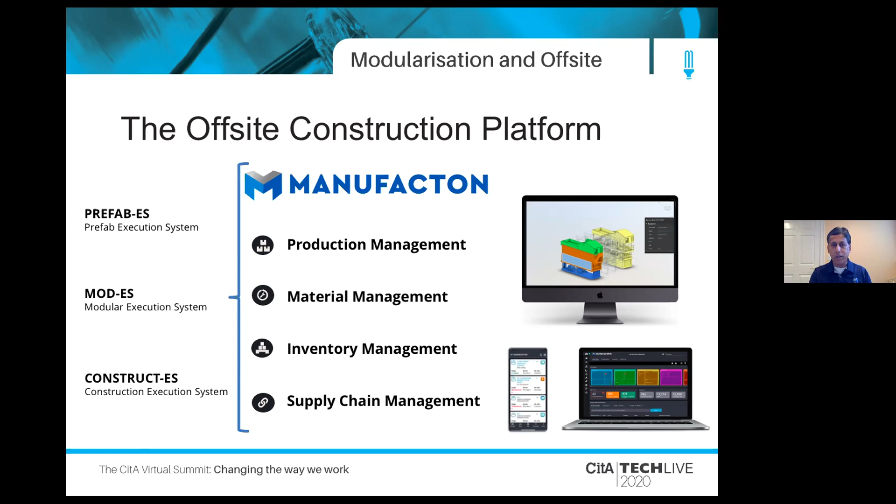So I think the interesting thing now would be to start off by looking at what's happening at the job site itself. All the general contractors are starting to think about, can the job site actually start becoming more like an assembly factory? So instead of bringing raw materials to the job site, can we not bring building components and systems and modules to the site, and the site becomes more like an assembly factory, putting it all together? And so that's the first step towards saying the industrialization of construction is moving construction from the field to the factory.

Alan mentioned CIFE, the Center for Integrated Facility Engineering at Stanford. Paul Teicholz, who started that in 1988, has been my mentor for 30 years. And many years ago, he had said, why are we talking about what we can take offsite in terms of prefab? Instead, should we not ask what we absolutely have to do on site, and start with the default position that everything should be done offsite?

And this was years ago. So it's happy to see now everybody is really talking about why do we need to do anything on site? Instead, do everything offsite, bring it in, and run the site as an efficient assembly factory.

So for example, this is one of our customers, Consigli in Boston, a very innovative general contractor. They had a project in Cambridge, Massachusetts, 50 Rogers, a very tight site, not enough space for even materials to be stored on the site. And what they said was, okay, what can we take offsite? So they coordinated the 3D model. And by the way, we work with Revit, Navisworks, BIM 360, the Forge Viewer, so we have a really good integration with the whole Autodesk platform.

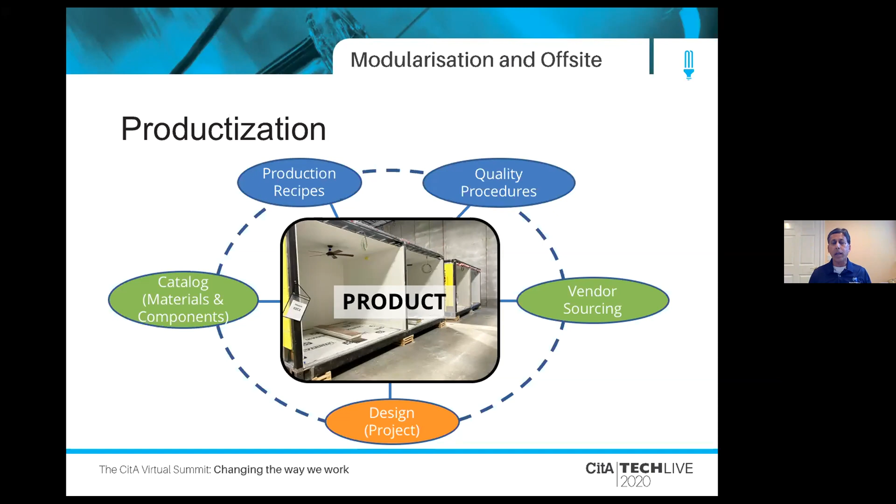So the interesting thing here is, from a general contractor's perspective, what we are starting to see is many of them are either building modular factories or they're buying modular factories. And what they're trying to do is take their self-performed work offsite. So for example, a pretty innovative large general contractor in the US, DPR, they built out a factory in Phoenix to do wall panels called the Digital Building Components. That is their own factory.

And then they purchased SurePods, which is a bathroom modular builder in Florida. And so now they're producing their own bathrooms and their own wall panels and so forth. And at the same time, they're working out their prefab strategy in terms of what they want as far as their productization of other capabilities, where they might work with other modular builders, other panelizers, other trade contractors, in order to try to get everything done offsite before they come to the site. So that's a good example of a blended strategy of working with other companies and building your own factories, or in their case, buying one and building one.

And then you've got a company like Skender in Chicago, which actually verticalized the whole process, where they brought in an architectural firm, and then they said, okay, we're gonna do the design, manufacturing, and construction verticalized for multifamily residential in Chicago. And they were using structural steel for it. And basically what they've ended up doing is driving from their factory to be able to do volumetric apartments that they could then send over to the site for completing the installation.

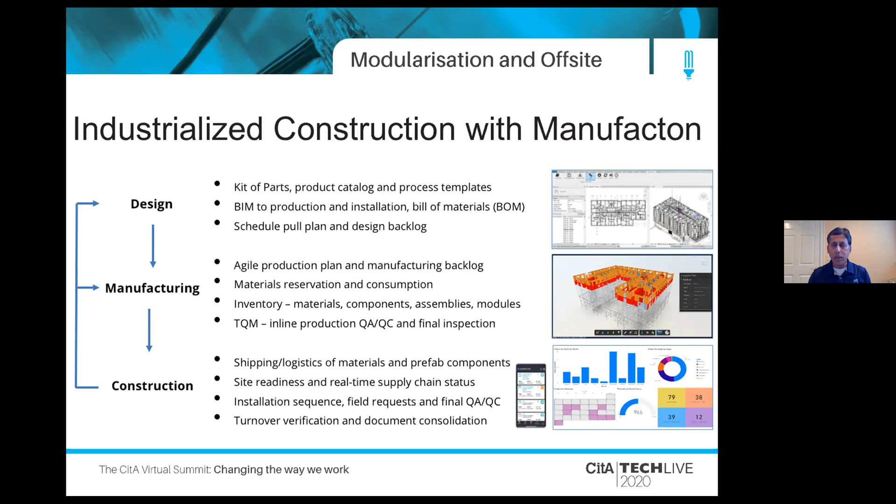And they've all been telling us, at least, that in the new normal coming out of COVID, they all see industrialization of construction is the way to go. And nobody is even now questioning why should we do it, and so forth. They're literally figuring out how best to do it from their vantage points. So I wanted to share what we have been seeing in terms of this acceleration towards modularization and towards offsite. Thank you.

Great overview, and a nice way to end the message that industrialization is the way to go. Thank you, Raghi. That was an excellent presentation. We have a few comments on the chat. I think, Ralph, you might have a question there. I think I prompted a comment by asking how early in the process should we be bringing modularization into the design? I know Ralph might want to elaborate on that.

Yeah, well, it's one of the challenges you see that most projects progress quite far into planning, detailed design, tender, before the decision is considered whether to go modular or offsite. And then often the effort to try and reverse engineer a project into a modular offsite solution is too expensive or too disruptive, and that becomes a stumbling block.

Of course, the procurement route that you choose would be impacted by making early decisions to engage with providers, because I suppose a lot of particularly public clients would feel they still need to go through a traditional tender process under public procurement. So the question really was, how do you integrate the suppliers into the early stage design?

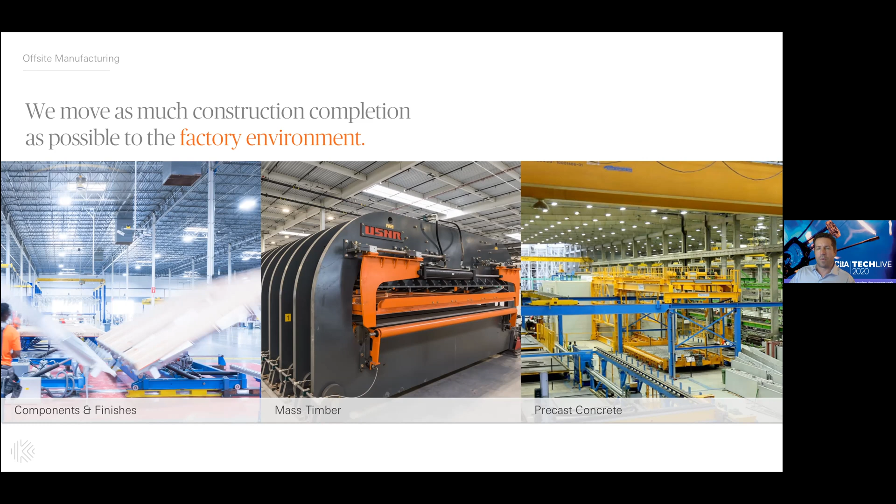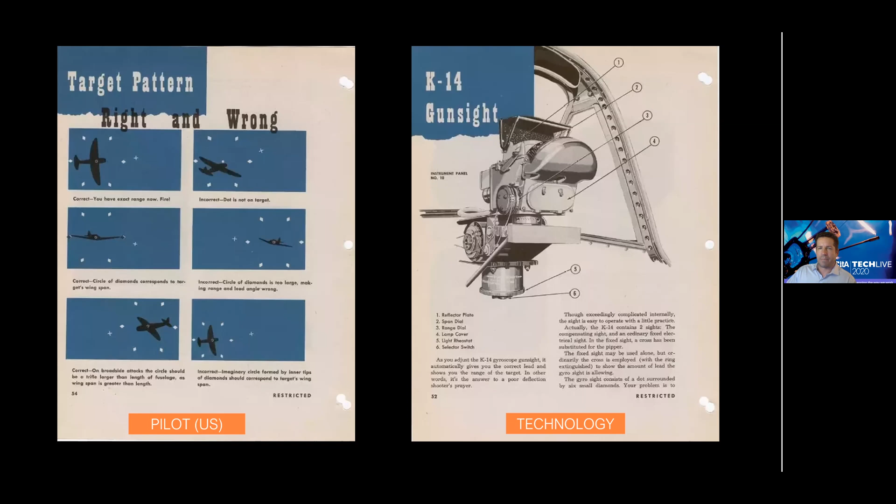And I think this is an analogy on the technology side. I think a lot of technologists approach it technology first, and innovation does come that way. But I think you have to understand where you believe the industry is going, and then technology is really a means to help you achieve those ends. So for the purpose of discussion, I'm going to talk about 3 things that we think are inevitable that will change the industry, and then how the technology we're developing is going to position us to take advantage of those opportunities.

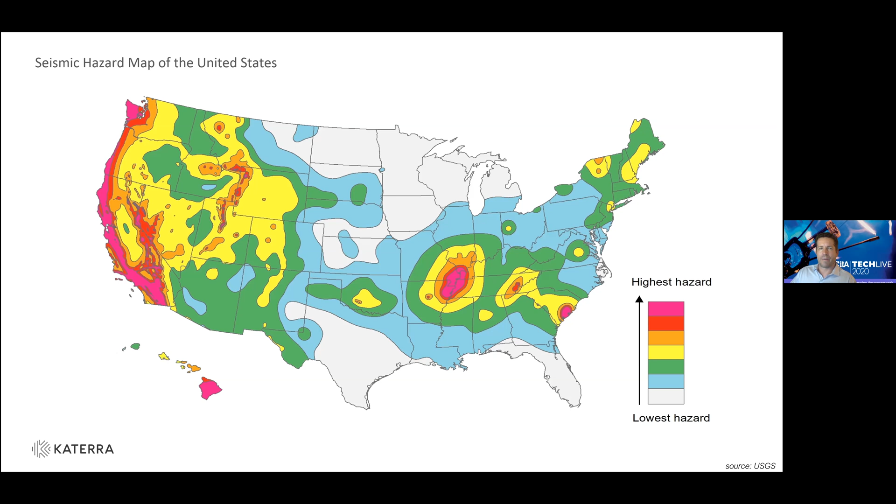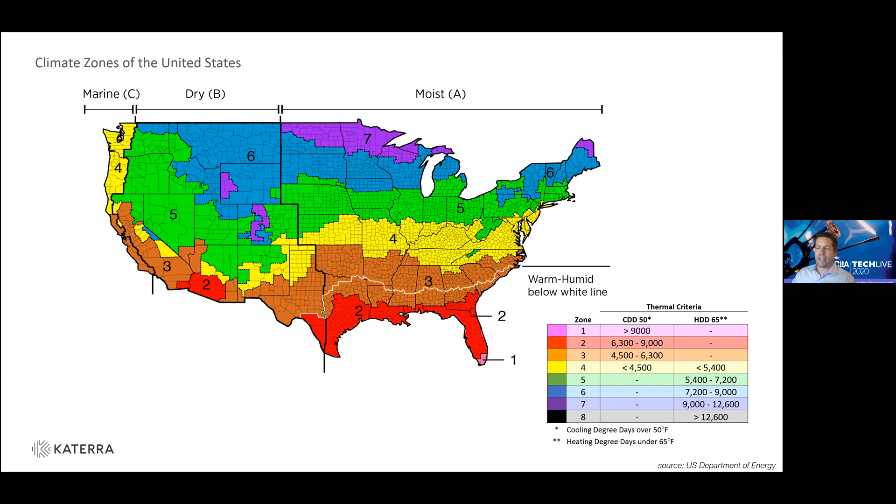The economics of how much work you do in the factory, what we call the level of completion, from a cost perspective, the optimum varies depending on how expensive that work is to do on site. So if you're in the southeastern United States where construction labor is relatively cheap, you might want to do less work in the factory compared to markets like the Bay Area. And how do you design a system that is able to have different levels of completion depending on the market?

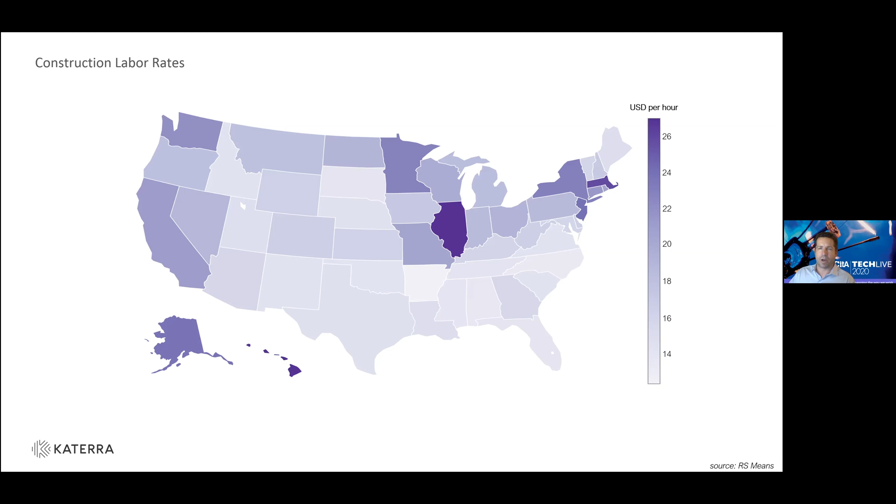So to achieve that, Katerra has approached how we can leverage technology to assist our designers in developing these mass customized solutions. To talk a little bit about that, this is the 24-unit garden apartment project that I mentioned previously. Of course, there's an element of modularity to the design. Katerra approaches it as many multifamily designers do, from the unit first.

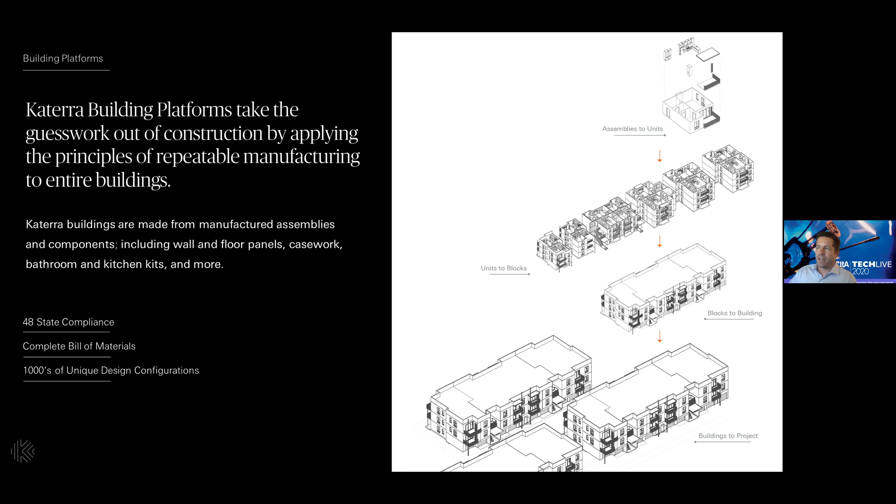So we have several standard units that can be combined in different ways into chassis; there are 3 chassis to each 24-unit apartment building. From that base standard set of 12 or so different units, we can get quite a variety of different building types that all fit into this modular scheme, and that enables us to meet different market performance. So that's one effort of modularization.

One of the main challenges that we faced is developing that fabrication level of detail model and doing that in a cost efficient and timely way. So early on in the business, we would have the architects and engineers designing a permit level drawing.

And model in Revit, but that wasn't really designed with an eye towards fabrication. And so our component design fabrication engineers were rebuilding the model from scratch to create a fabrication model that has every stud and every piece of hardware located. It's taking quite a lot of time and cost.

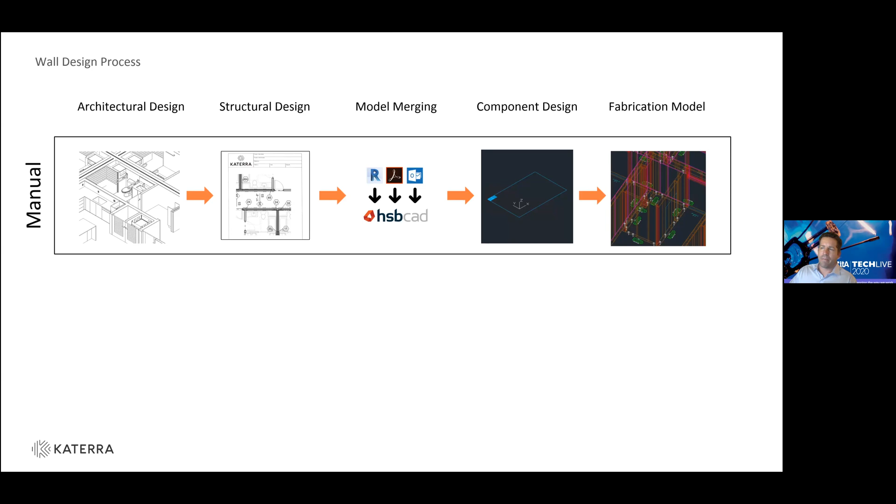So using software, we changed the approach, and we had specific BIM standards in which the architects and engineers had to use a kit of volumetrically accurate components and attach metadata that would specify the framing types. That would also drive the drawing production, but it would also be used by the software to automatically lay out the framing and place hardware, so that wouldn't be a manual step.

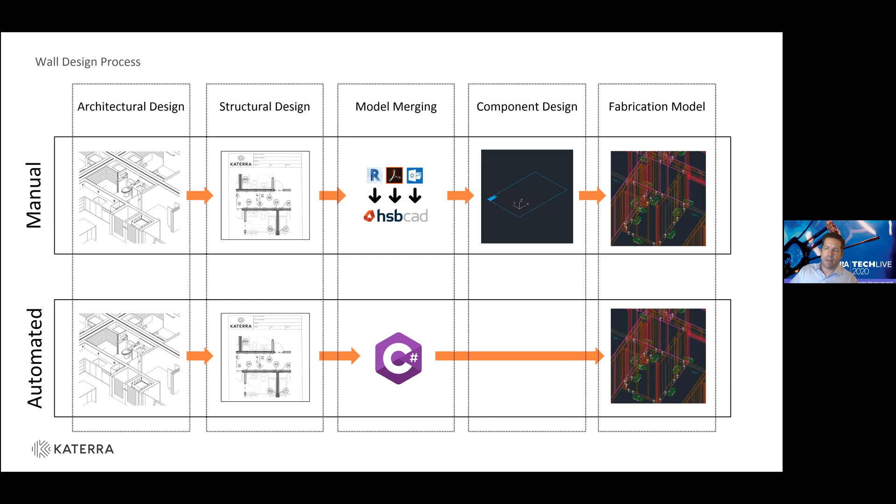So we applied this systematically over time to reduce effort in the component design phase. I won't go into detail of all of the different steps that the designers would do to create a fabrication model, but we looked at which of those steps could be automated. And over time, today we're at roughly 30% of the effort that we were in late 2018.

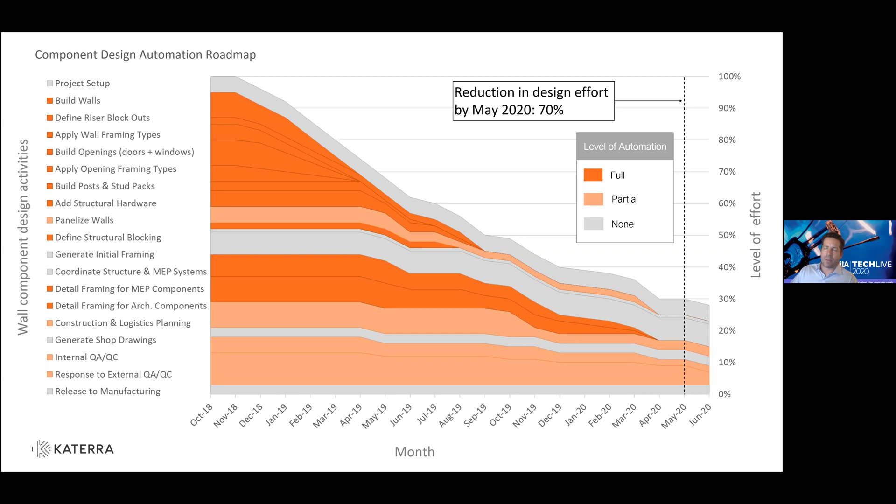And what's interesting about that is it really changes the skill demand of what we need on the design side. Before automation, we had roughly even percentages of novice, being less than 2 years in the trade, journeyman, and then experts, meaning 10 years plus. And what we found after the automation is that we needed less of the entry level folks, as you might imagine, because those tasks were often helped with the software. The size of the pie isn't the same in each case, but there's relatively more demand on experts to really handle the unique cases or quality control the output.

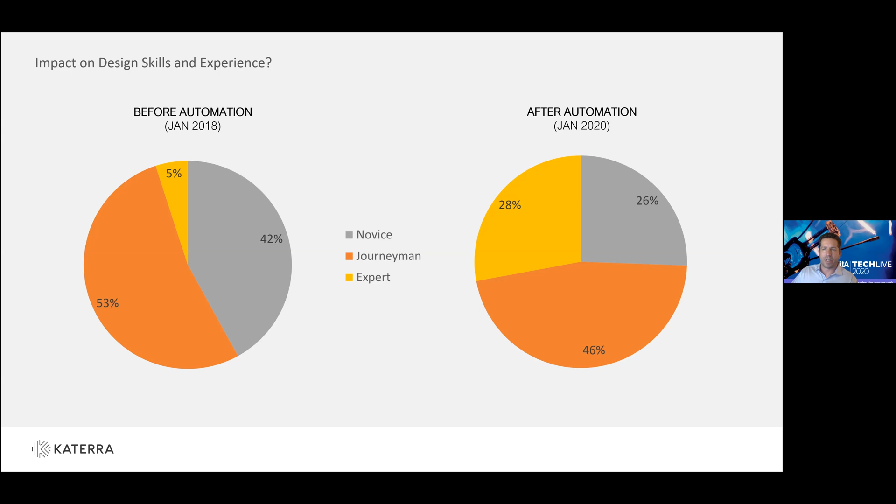And so it's interesting, what does that mean in terms of young designers entering the industry? We're already seeing that a lot of the designers have some background in technology and software development, and so they become tool builders and contribute to the business that way. So we've paired young designers that are able to develop scripts and automation with our more experienced designers, so they're working together to build tools that will enable the business to be more efficient.

The final point that I wanted to make, and I think Raghi touched on this, is this feedback loop of, once we really understand the production system and we have an automated design, we're able to rapidly iterate and do some very interesting things from a product development perspective. And I think that's really exciting for the industry. I'll touch on a couple examples briefly of that.

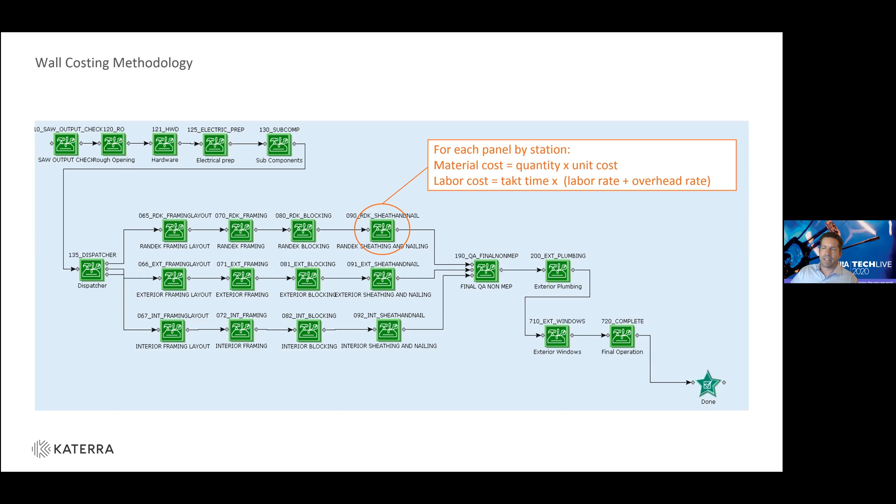And what that enables us to do, and is interesting from a design perspective, is we can surface that information to the designers so that instead of them specifying the construction of the wall, for example, they're defining the design space in terms of what different materials they want to use, what different spacings and sheathing type, and what performance they need out of the assembly.

And then they submit that, and then the system is recommending an ordered list of constructions by cost that best meet that criteria. So the engineer is recommending performance, and the technology is helping them understand cost. And what's important about that is the factory is pretty dynamic. They're constantly changing the layout or the equipment, at least that's the case in my experience. And so this system is constantly learning and updating itself based on what is cheapest for the factory today. And so that enables the designers to have current access to that information.

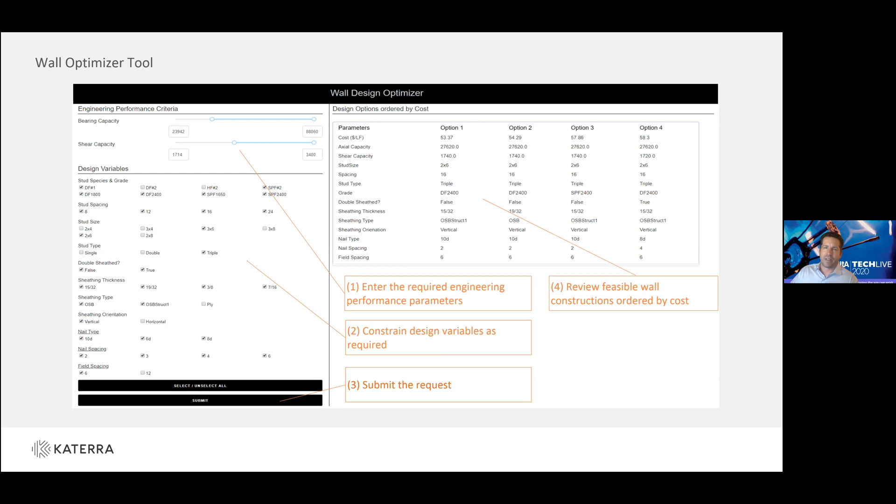We've gone back and sort of retrospectively analyzed past buildings, and that's enabled us to look at millions of options instead of traditionally just a few that would be done manually, and achieve some margin. So we're not talking about huge margins here. I mean, just an extra 10%. But I think many of the building systems can be optimized in this way. And if you're able to do this systematically, you can achieve meaningful differences in cost just by understanding your production system and surfacing that information up to the designer.

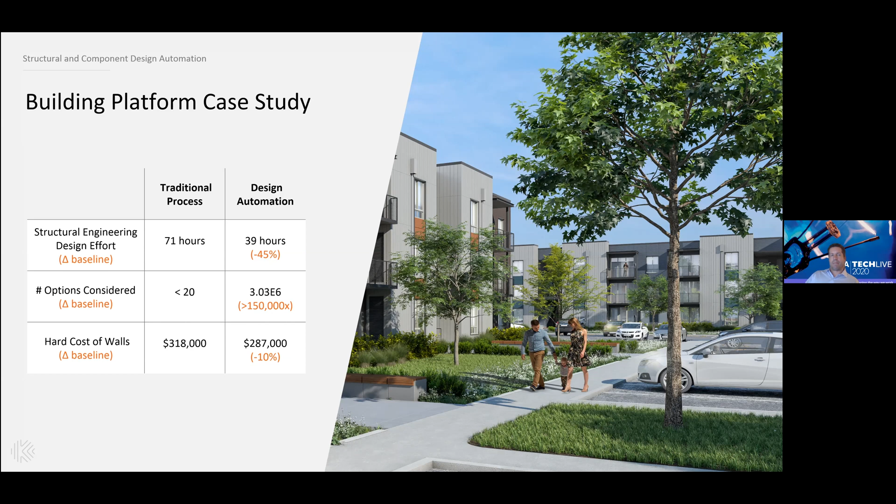And the final piece that I wanted to talk about is really about the bill of materials and developing material forecasting. So one of the challenges that Katerra had was, there's an advantage if you're able to understand your material demands early. You can buy more from primary suppliers at a discount. And we weren't very good at doing that. So we've gotten better over time by applying some technology.

So right now we have all of our Revit models in the cloud. We're able to analyze those at various levels of design and fill in any gaps. So if the structural hasn't been designed yet, we're able to look at historical data to fill in what materials are likely to be demanded, and then surface that at a portfolio level to our materials group so that they have, say, a 12-month forecast of what the material demand will be. And that's enabled them to negotiate better pricing with suppliers, since they don't have to buy their material from distributors or reps on short notice at a markup.

With that, just wanted to touch on a couple of the technologies that we're developing to try to enable that tighter integration between design and production. So I'll turn it over to you, Alan.

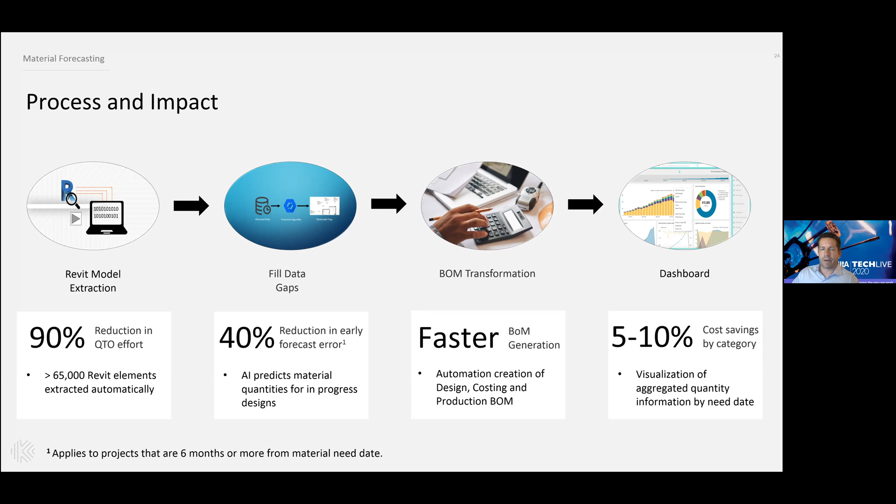Thanks very much, Fraser. That was excellent. So it's obvious then for companies like Katerra that you're constantly making improvements, learning how to remove the rework and to become a leaner manufacturing company, I suppose. So my question is, to what extent do you look at lean construction and the Toyota production principles and all that?

Yeah, I think we do. In the same way, I think one of the learnings has been that needs to extend beyond just the factory, right? To the site as well. You can't just optimize for the productivity of the factory. And one example of that is panel sizes and how panels are routed through the factory. That has to relate to the erection sequence, right? There may be a most efficient way to fabricate those. Of course, they have to be pulled off the truck in a certain order to be set on site.

And so it really needs to be a holistic optimum in which you're considering on-site assembly, logistics, and fabrication. And so from a technology perspective, I think that is something where you have to be able to look at that overall.

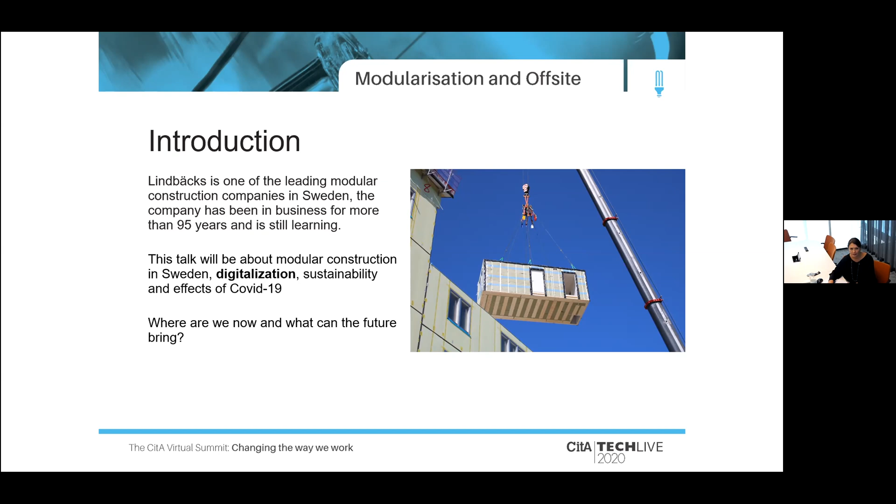So modular construction in Sweden: 45% of all housing construction has some level of offsite construction or panel or modular. So it's quite a big industry in Sweden. We have different types of frames, but mainly high quality timber. We have a lot of wood in Sweden, so it's natural to be using that. Sustainability, time on construction site, and quality, being able to do most of the construction in-house, are driving forces that support modular construction.

There is a range within the companies that are in the modular construction business, from family houses that are delivering products to projects where we are working, from single family to multi-family, hotel, student and retirement homes, and so forth. And how the business is done is different. If it's a one family home, it's more from the catalog, or we have companies that are quite far ahead in the digital part, where they can configure their houses online, mainly more simple houses like garages and so on.

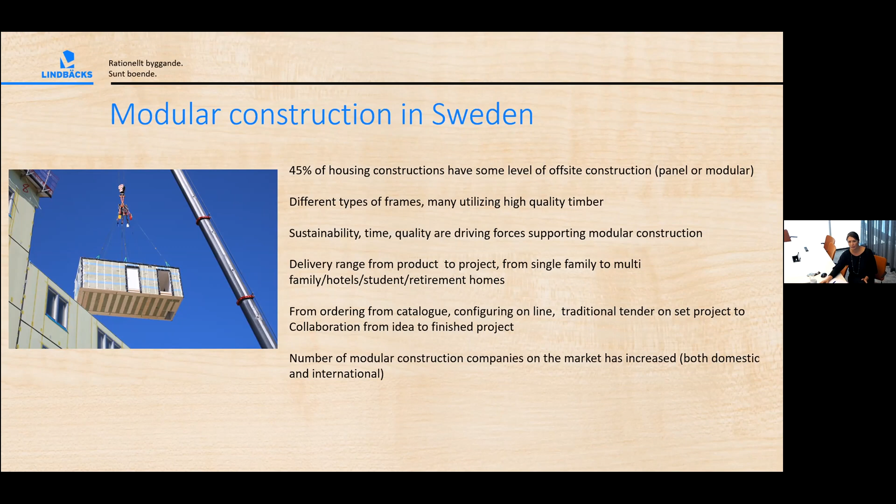Yeah, and traditional tenders are one part that we sometimes get in touch with, but most of the time we try to collaborate from idea to finished product with the owners. We have also seen that the number of modular construction companies in the market has increased in the last 5 years. And we have new players coming in, both domestic and international.

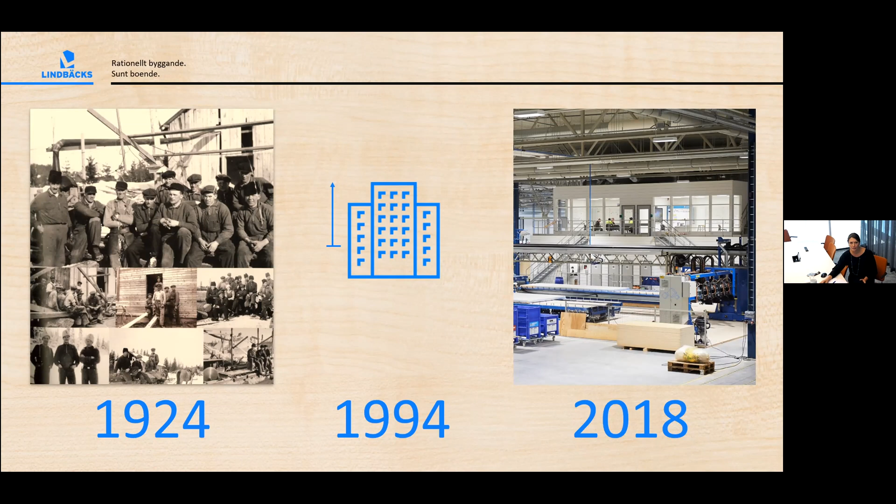If we look a little bit at Lindbäcks, we started in 1924. In 1994, there was a change in regulations in Sweden, so that we were able to build higher houses in wood. So that was when we started going into modular construction. In 2018, we started up a brand new factory that more than doubled our capacity. So that's where we are now. And this is the family that is running the company at the moment, third and fourth generation, you see here.

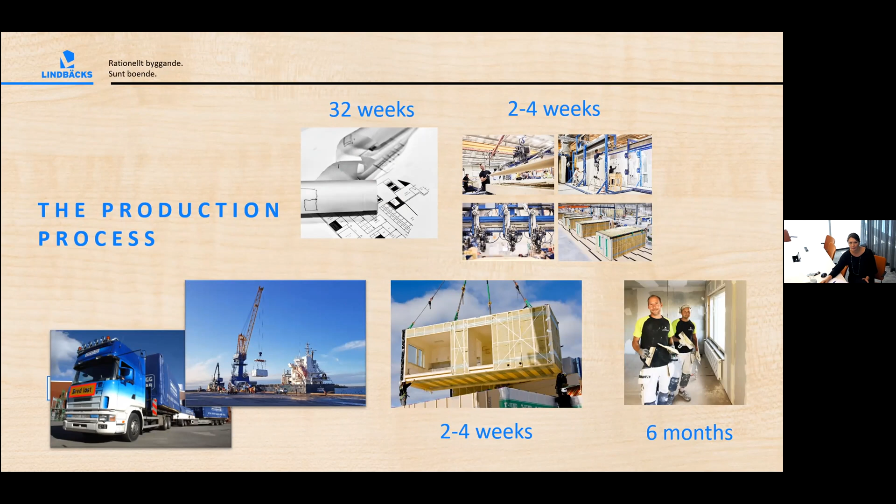What we are building is 2 to 8 story family housing, condominiums, student homes, rental apartments, retirement homes, and some hotels as well. The production process is that 32 weeks before we start in the factory, the engineering starts. And then we are in the factory 2 to 4 weeks, depending on the size of the project. Then we transport the modules either by truck or by boat. And then we assemble 2 to 4 weeks on site, and we have a finalization period of roughly 6 months. And here is a short video that I'm going to play that shows our new factory.

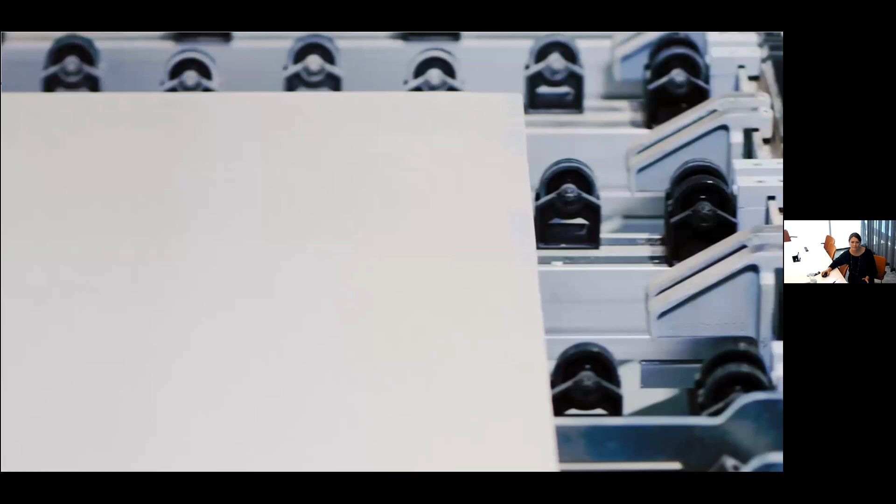Hi, I'm Henrik and this is our factory. We are an industrial building company using wood from the northern forest, creating apartment buildings in Europe's most modern production facility. In a weather-protected environment, the volumes are built, step by step, along our preparation station and our main production line. Our building system can fill many different needs.

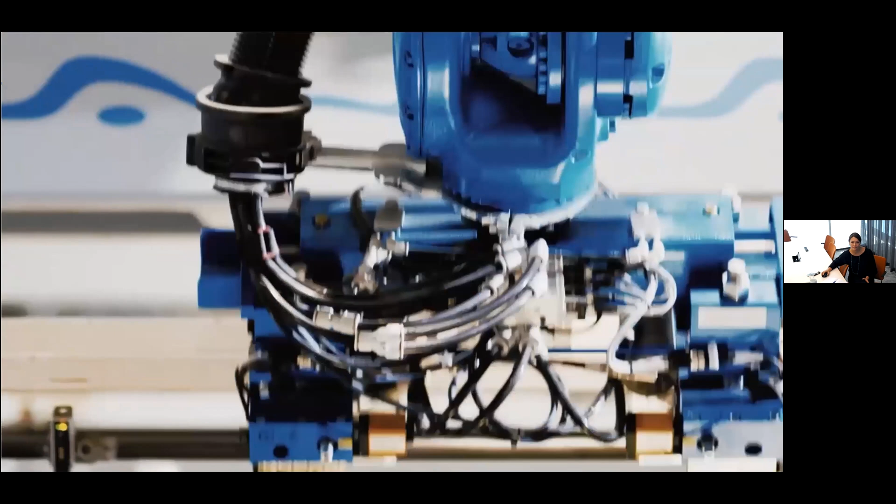We build everything from student housing, rent-controlled apartments, to condominiums and retirement homes. We offer a full-service solution where we take responsibility for the entire process. This means security in terms of price, product and delivery times.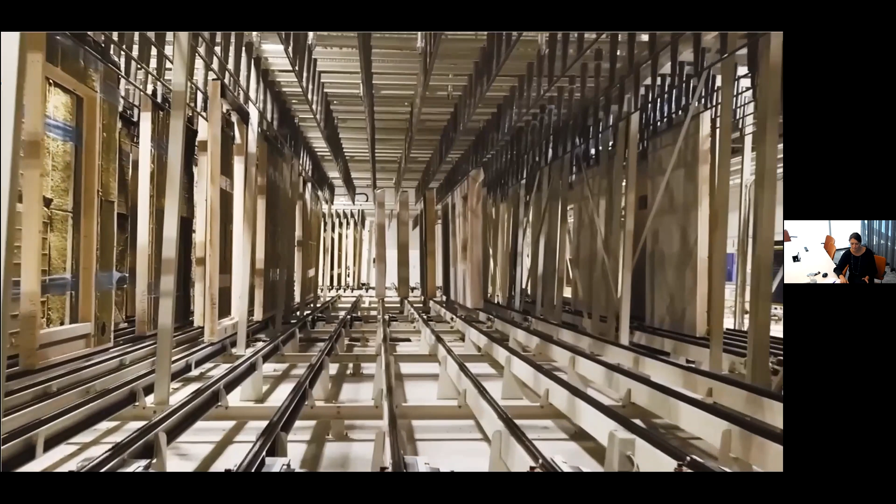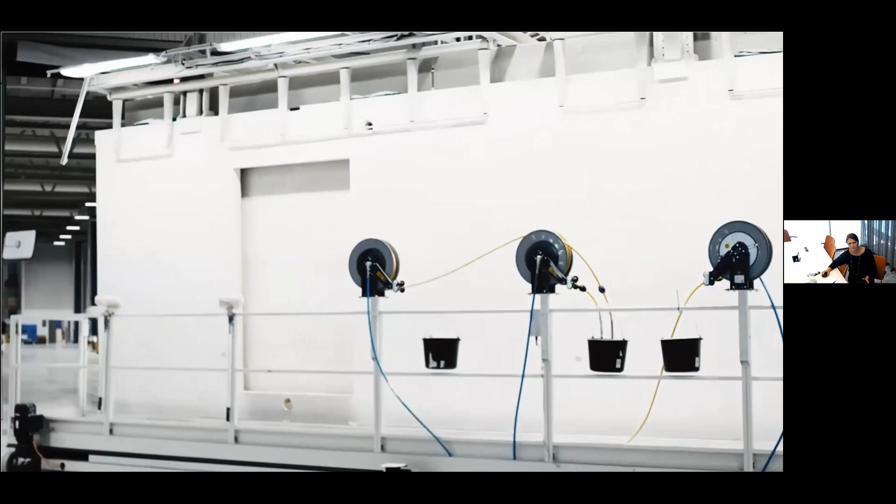Along the wall line, the exterior walls are put together. Here, we assemble windows, bolt, insulate, and paint. When the wall is ready, it proceeds to the main production line for assembling. In parallel, the partitions are built and painted. Just as the exterior walls, they are fully finished when they are assembled.

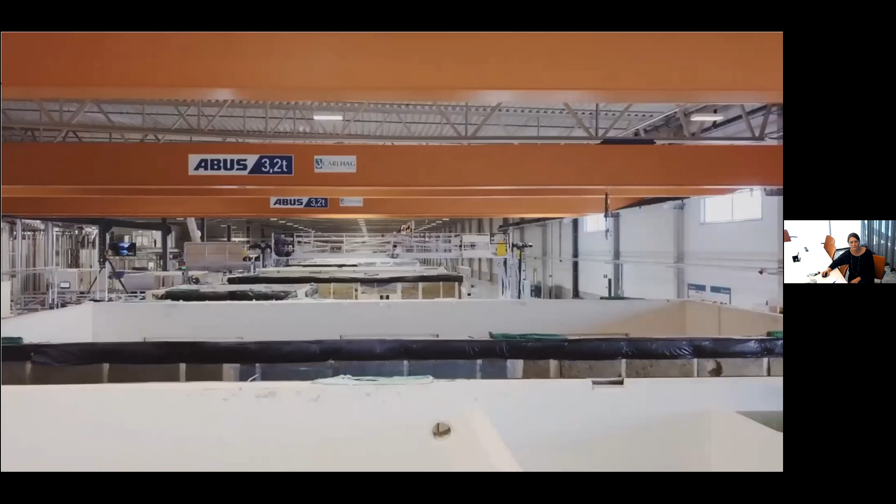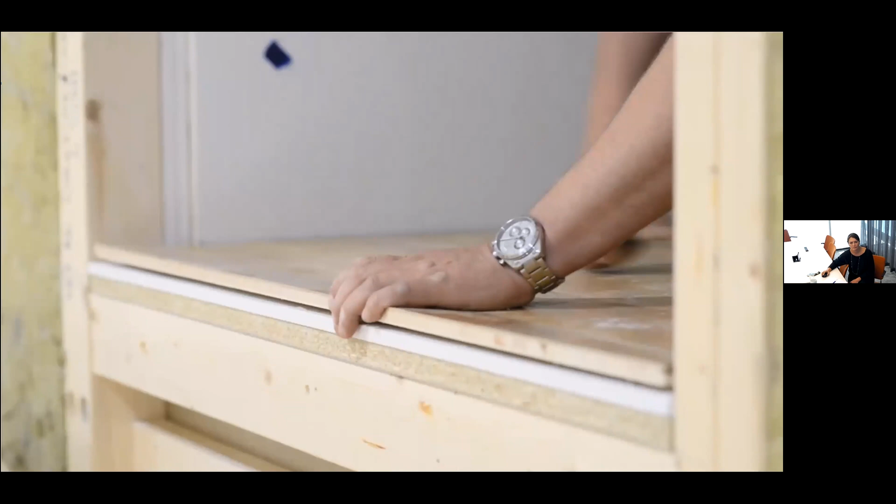The main production flow begins with the construction of our floor structure. Then our composite bathroom is put in place and partitions are applied, as well as exterior walls and ceilings. When all elements are put together, we install the kitchen and apply the floor surface layers and complete with plumbing. After that, we review the volume to ensure quality.

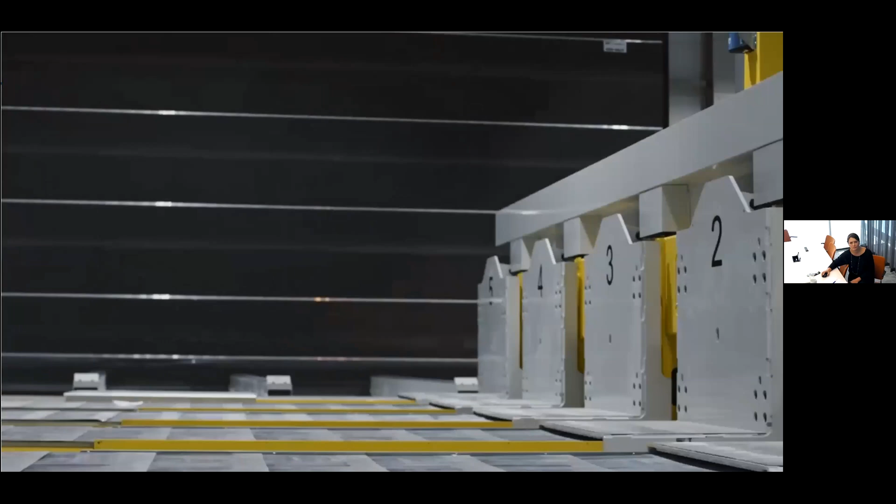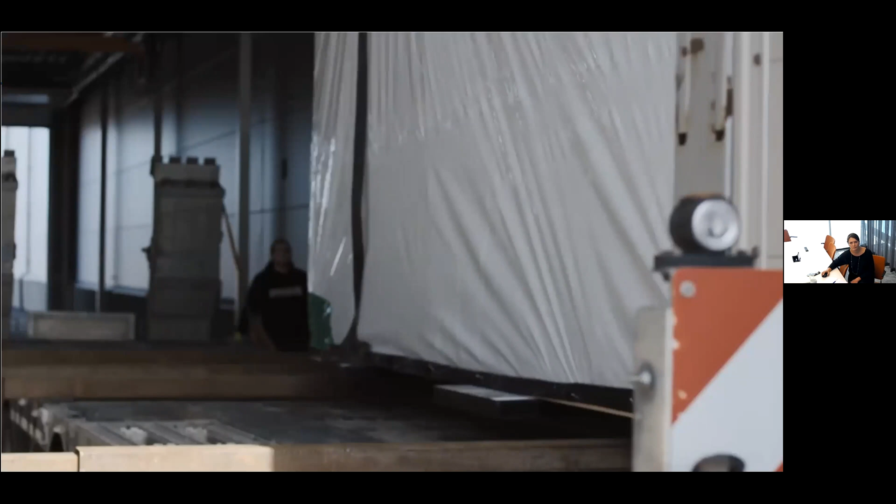In the last step, the module is sent to the automated warehouse. Here it's collected by an autonomous robot that loads it on the trucks. All that's left is delivering to the construction sites. Thanks to our industrial construction, we manage resources efficiently and build climate and cost efficient with high security.

We build industrial because we believe in creating homes for more people. We build industrial because we believe in living for the many.

And these are a few of the projects that we have finished. So this is in our hometown, Piteå, where we built Tallen. This is here in the Stockholm area where I'm also located, where we have built condominiums, 203 apartments.

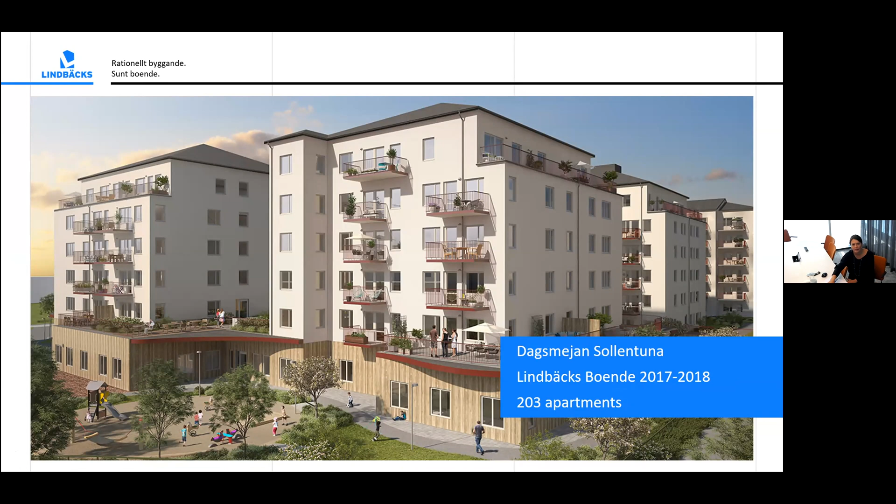And digitalization then, going into that part. Where are we now? We see that in the industry in Sweden, it's starting to mature, it's starting to happen in things. Some have reached further than others, but most are on a journey and we still have a long way to go. But there was a recent poll done by a company, and they were asking people working in the construction industry on site and with engineering and so on.

And it shows that 83% of the workforce believe in digitalization. 97% think that they will use more digital solutions within the coming 3 years. So there is starting to become a kind of a pull effect, that people are asking for digital solutions rather than them being pushed on them.

At Lindbäcks, we have been implementing quite a few digital tools to support our processes over the last years. It has been incremental and continuous improvements, around 80% of the effort, and some experiments where we work together with the universities to develop new things and test new things and learn. So some examples of what we have done.

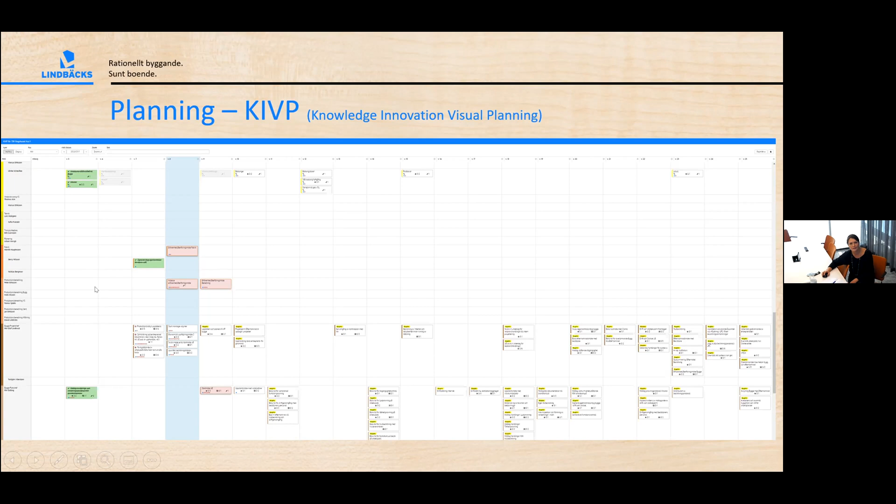We also have a way of doing deviation reports, and this is to be able to learn with 2 factories and around 20 building sites spread all over Sweden. It's hard to get the feedback loop working. So we have this tool where every function can report if something that they have received is not fulfilling what was the plan quality-wise, and direct it to the right function. And we follow up on that. So it's a mechanism for continuous learning.

And this also ends up in us doing these daily huddles. So 7 o'clock each morning, it starts out on the building sites and in the factory. And then it goes up the chain of command with questions on if everything is okay or if we have any issues that need to be lifted. And at 9:15 each day, the management group has a meeting, 15 minutes, where they go through if there is anything that needs to be taken care of right away.

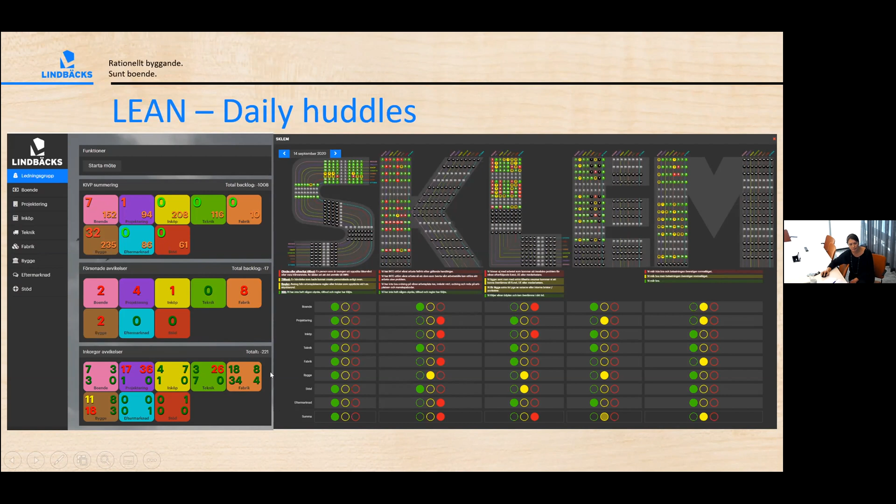The figures that you see here are the different areas that we follow up. Since it's Swedish, it stands for safety, quality, delivery, economy, and employee, and how they are feeling and doing. We also follow up the planning that I showed you earlier. Do we have any late deliveries that need to be taken care of? And also, do we have any deviations that haven't been answered in the time that is set depending on the priority? And we see how much they have in each inbox of the deviations as well.

We have also spent quite a lot of effort in the new factory. We have a project called 10S, which means that it shouldn't take more than 10 seconds for someone working on the assembly line to find the right drawing, the standard operation sheet, and bill of materials. We also have digital quality control that is made in the factory. We have the automated wall line, and we have the automatic warehouse that you saw in the movie as well.

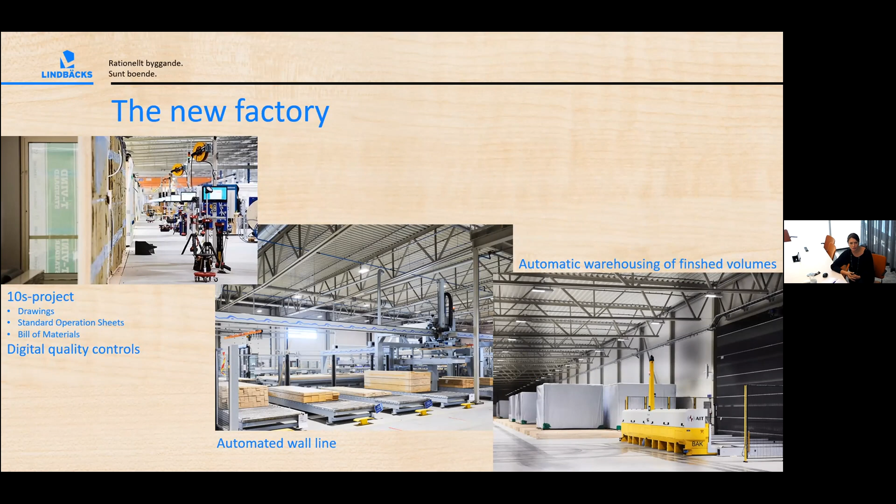We do condominiums where we are the developer as well, and here we have had a way of communicating to the end customer so that they can follow the process from when they have bought their apartment and what is happening when it goes through the factory, when the assembly starts at the production site, some words from the architect, and so on. The customers have liked this, to be able to follow their own apartment.

If we are looking ahead, what we are focusing on now, we have grown quite a lot in the last 5 years, more than double in number of people and operating earnings. So we need to focus now on the end-to-end process. We have been good at doing stuff for every function, but now we need to take the next step to be able to have the information flow in a more effective way. We also need to look into the infrastructure to enable us to take part of all the new technology. Also going from looking at systems as separate parts to more thinking platforms.

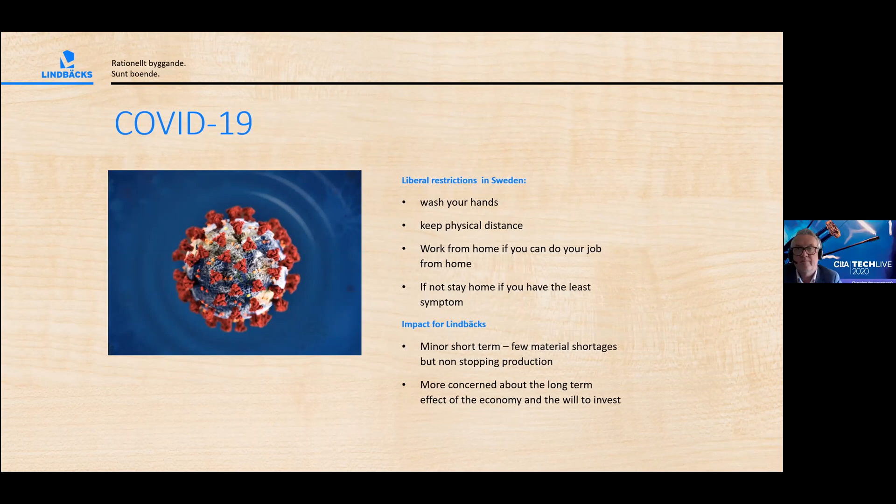So, thank you. So Anna, thank you. You did a great job, and I think you've brought things nicely together for us, because Lindbäcks are a sustainably focused industrial company. And you're bringing in inclusiveness, diversity, you're measuring all the data of a modern construction business. And that ties us right back to day one, speaker one, who spoke about all of these things, that that footprint of sustainability needs to be there.

So as usual with my chairmanship, we're running a little bit behind schedule, but Anna did a great job. Thank you. It's always insightful to get a lens into what other countries are doing and what other companies are doing. And so when I found you online and I found your company, I just thought it'd be an interesting story, and you certainly did a great job, and wish you all the success going forward with the company.

Do we have any questions there for Anna before we move on to our next speaker? I think Simon had a comment? Is Simon with us? Yeah, can you hear me, Alan?

Yes, Simon. I was just wondering, how are you framing your multi-story wooden modules? Are you building off a steel frame, or are they structurally strong enough to support themselves? They're structurally strong enough with a wood frame. Excellent. That's it.

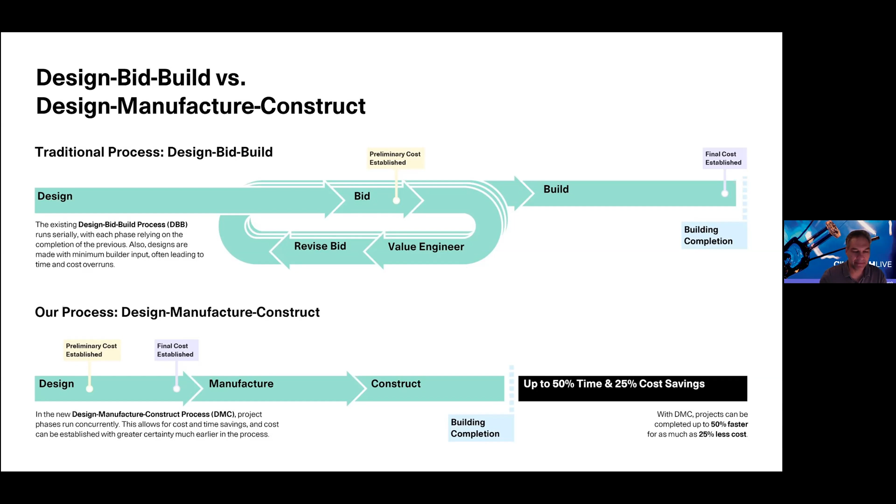And these are some of the other value propositions: lower building cost, faster production and delivery of developments, obviously safer work conditions. You've seen that from some of our other presenters today. Almost complete time and cost certainty. Working in an environment like New York, the neighborhood disruption is often a huge problem. Our solution doesn't require any scaffolding, doesn't even require a hoist. The building is delivered fully waterproofed and enclosed and almost completely finished.

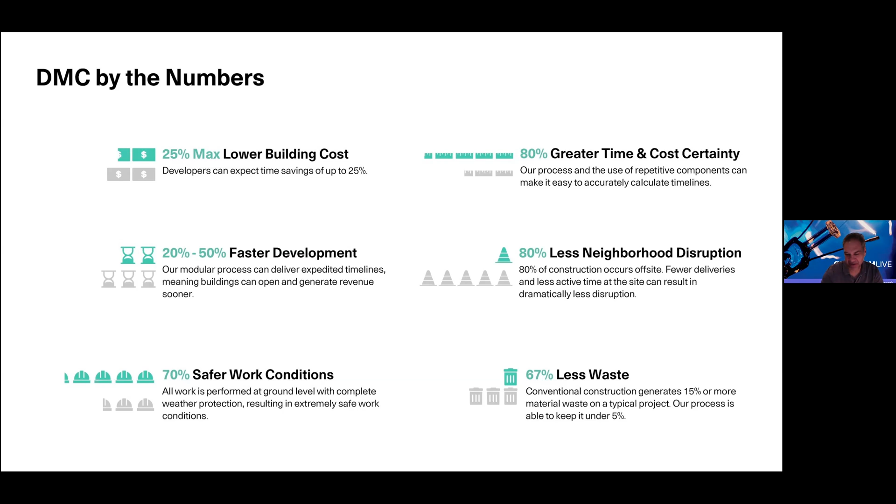And then from a sustainability perspective and carbon footprint, we have 67% less waste at a minimum, and we're talking at less than 5% total waste. So this is really where we started, and now I'm going to talk to you about the idea of implementing a systemized approach to creating the built environment. So we have created an organized and parametric process for creating the built environment.

The interesting thing about multifamily housing, especially mid to high-rise multifamily housing, is that the parameters that are created by code and regulations drive very limited choices to what you can actually do to a building. And at the same time, for some reason, our AEC community has still managed to treat every multifamily building like a multifamily building has never been built before. And hopefully some of you are smiling.

It's absurd. Basically, multifamily buildings are very similar. And you want to build a building that is high quality, that meets the needs of your customers, that is as small as you can build it and still be marketable, because you increase your return on investment, et cetera, so on and so forth. And so understanding that, and adding the volumetric parameter to it, the process is pretty simple. And we at FullStack have been pushing that and have made tremendous headway along those lines.

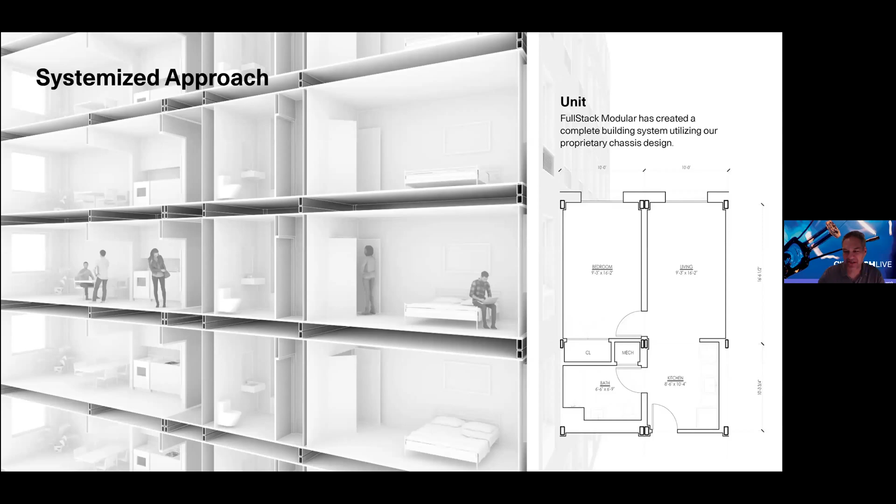So if we think about the assembly, we see we have a set of unit types and a set of unit combinations that allow us to build a multifamily building. This is, as Ravi talked earlier, the process of productizing multifamily housing with enough flexibility to meet the needs of the developer and the end users, but also enough process to create economies of scale.

So our world, unlike the construction world, which is divided by trades, is divided by assemblies and sub-assemblies. The assemblies are the units that we were just talking about, and the sub-assemblies are the pieces that go into it. Now, those pieces can be MEP systems, they can be fully integrated kitchens, they can be bathroom pods, and in our case, we have facades that we install in the factory, and all of the subcomponents of that. We organize our manufacturing process in that fashion and not in a trade fashion.

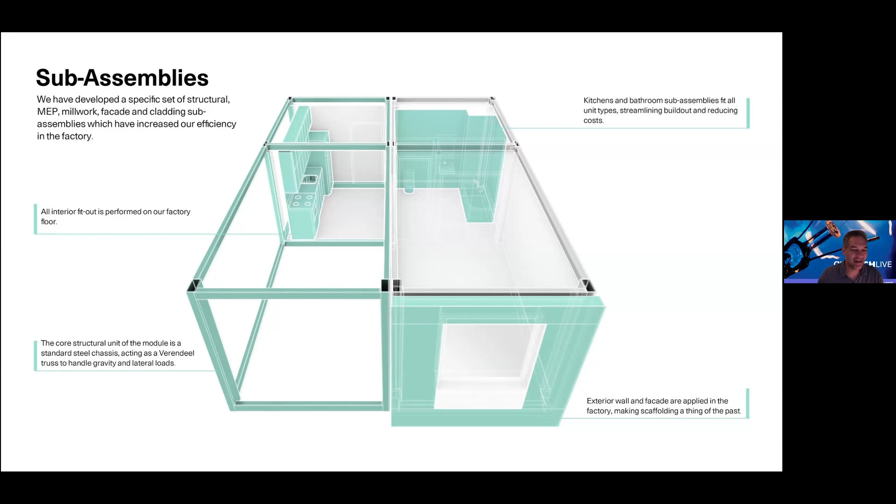All the workers at FullStack Modular are workers at the company directly. We do not have any subcontractors. So all of the work is done in an organized, manufacturing-focused fashion at our factory, our first factory in Brooklyn.

So we hear every day about technology and construction technology, and one of the things that is often overlooked is that our process on the construction site, we all know, is incredibly inefficient. And utilizing advanced construction technology on the construction site is quite complicated. On the other hand, in a factory, it's pretty easy.

So at FullStack, we have focused first on what we think is the primary risk of building offsite multifamily, or any buildings for that matter, and that's dimensional accuracy. If you do not build the building accurately per the model, you're going to have problems either in the factory or when it arrives on site.

And so we have developed systems both in the factory and on site to maintain tolerances of 1/32 of an inch or less, both in the manufacturing process in the factory and also checking the accuracy of the assembly on site before we send more mods for manufacture.

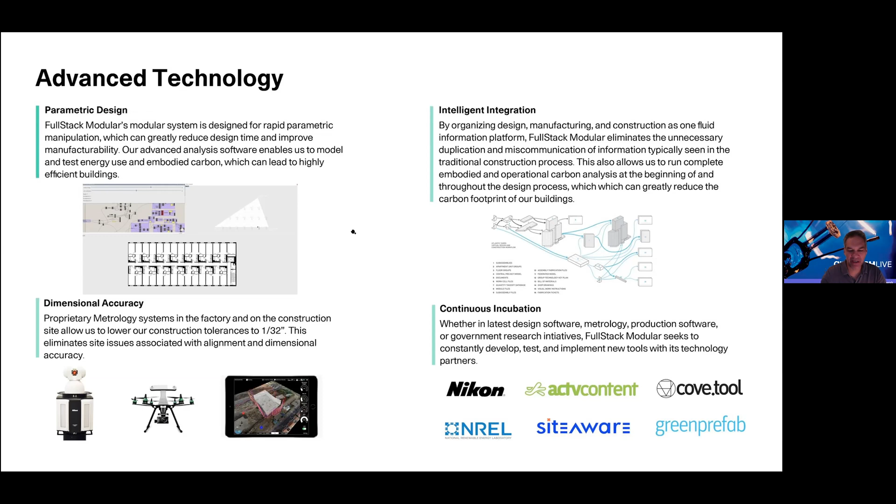So as a way of talking about what it is we do, I thought I would show you, we'd create a building using our system online right now.

So Alan, I'm presuming you can see my screen now? Yes, good to go. And it says building dimensions on the left-hand corner there? Yes. Okay, great. Thanks. I appreciate it. I just never know if I'm... No, that's okay. You're doing great.

Okay. So let's take a standard multifamily building in New York of the larger size and say it's 100 feet long, and that its standard residential depth here is somewhere between 65 and 70 feet, and that we have a building height that we like to do mid to high rise. So let's say we're going to go 150 feet tall. So now we have a bunch of questions to answer.

What market are we building for? These units, as you might guess, are actually pretty large and probably are not very marketable from a value cost per square foot. Whereas these units would be incredibly micro units, co-living, et cetera, and probably not the ideal thing for this area. So I'd say we'll go with 12.5 foot wide. You're going to end up with 600 foot units-ish on the one bedroom side. And then this will give us all of the parametric options for the unit combinations for a building.

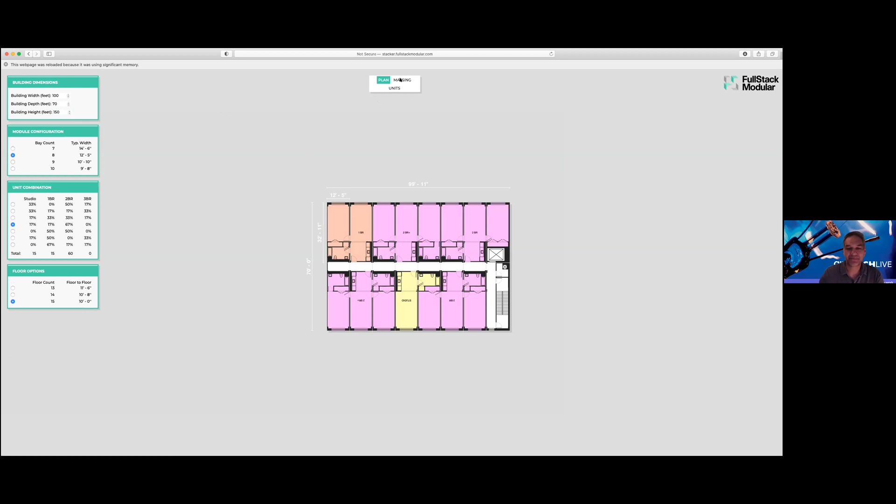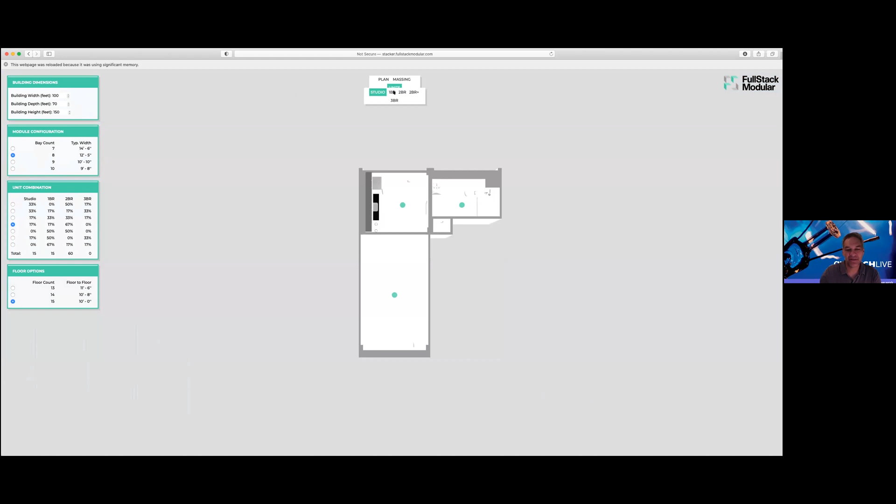Then we're going to see the units, studio layout, 1-bedroom layout, 2-bedroom layout, and this isn't going to come out really well on the screen, but if you play with it on our website, you can do a complete walkthrough, look at the units and see how they're operating. But not only can you do that, you can actually say, okay, what if I made my ceilings higher? What would it look like? What if I decrease the size of the unit width, et cetera.

So this gives us and a developer very good information very quickly as to what it looks like. And then this metadata that's created within this system is giving us an opportunity not only to know what the building might look like and how it would work for the developer, but it's also giving us the data so that we're able to price out the modular portion of this project in very short order. Now I'm going to go back to my presentation if I can.

It's good to go. Thank you so much, Alan. I appreciate the coaching.

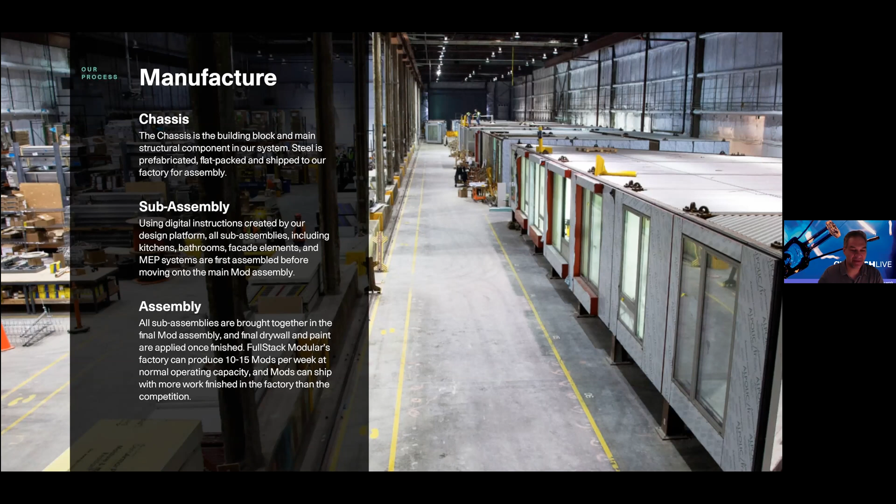And then in the construction side, we transport the mods. They're wrapped, they're waterproofed, they are stacked. And as I mentioned earlier, unlike a wood product, these units are actually very rigid, and they have extremely tight, as I said, 1/32 of an inch tolerance. And the system has adjustments built into it that allow you to adjust for any steel problems, settling problems, et cetera.

And then the mate line work, which in our system is just connections. So all of the mechanical, electrical, and plumbing connections, and then the structural bolting. I guess I should mention, there is no welding done on site in our buildings on the modular portion. Everything is bolted together like an erector set or a set of Legos.

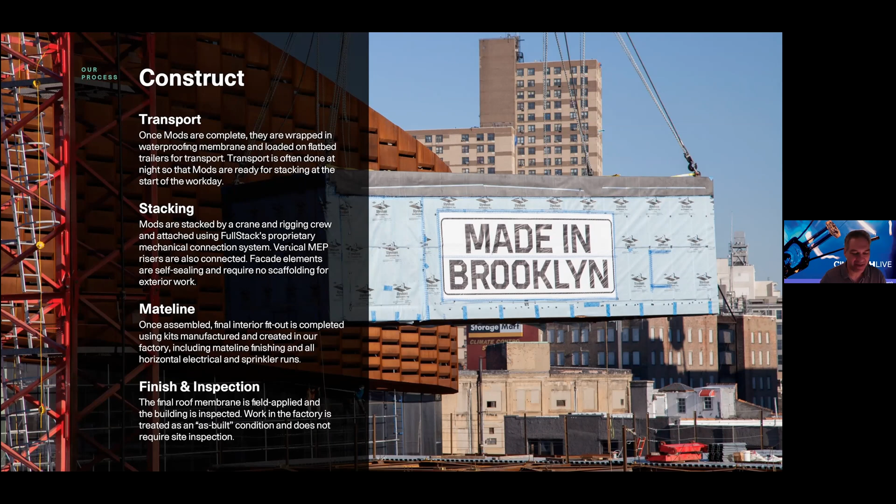But we actually could physically disassemble this building without too much complication once you figured out what you wanted to do with the mechanical systems as they got disassembled. The advantage of this process is that iteratively, we create a library of products that we can organize, reorganize, and reassemble in different locations. And in addition to that, it allows us to analyze the units, the data, and also the operations of the building by virtue of our ability to integrate any piece of sustainability or any monitoring product as we're building the buildings at little to no cost.

Additionally, it allows us to build incredibly sustainably. We are working on several Passive House specified buildings right now. It's pretty easy to integrate. Obviously, you end up with thicker walls, and you sometimes have cost of materials that are beyond standard conventional solutions. But from a labor perspective, we're able to keep that equal.

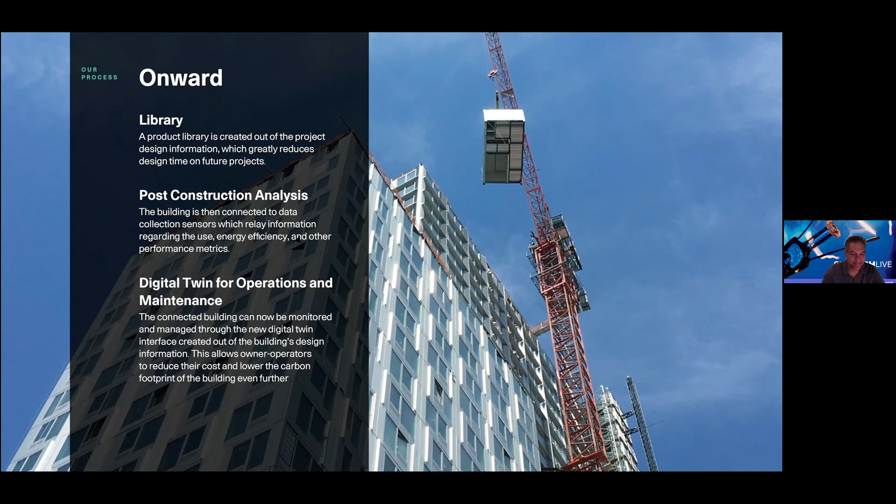And then our process is pretty simple. Modular analysis and initial estimate, modular blueprint agreement, which we use as an engineered schematic design, which takes somewhere between 8 and 12 weeks. And then that gives rise to a modular construction agreement. We are a fully integrated solution, so come to us with a product you want or a building you want, and at the end of the day, we're going to turn over the keys, fully bonded, licensed, guaranteed maximum price.

And we are, as I said, located on the East Coast of the United States, soon to be expanding. So I thank you for your time, and obviously would welcome any questions that anybody might have.

Thank you, Roger. Fascinating presentation. Of course, you have no restrictions in building high, like we have in our country, maybe other countries. So fantastic feat in action.

Again, my chairmanship is such that I know we were slightly over time. It's to do with the chairperson. Sorry about that. But listen, that was absolutely fantastic. We might just take one or two quick comments and then we'll come on to our final presentation. I've no problem running a little bit beyond 3:30 if people want to stay with us. I know there's a few questions there we'd like to tease out with people. But I know there was one comment there from Martin. Martin, you had a question about the bolted joints.

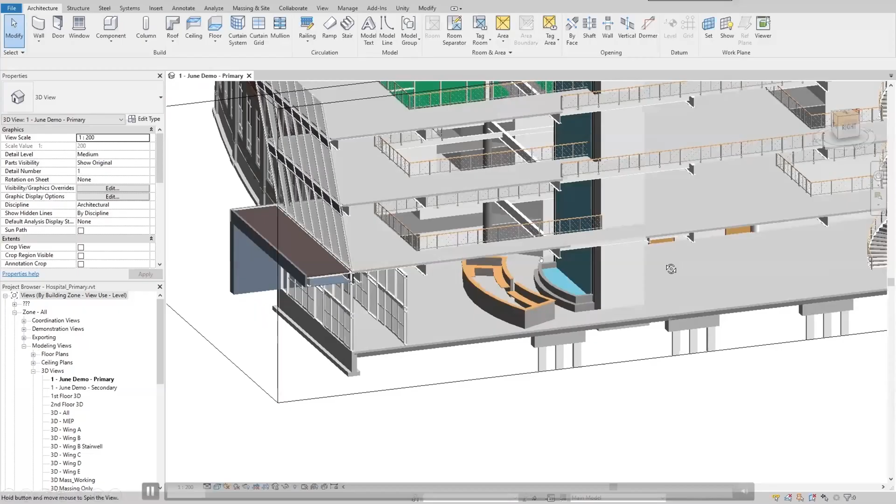And then we create bespoke viewers or use the standard viewers, which allows us to push the BIM information to a multitude of different devices. So we can take the information live and create live collaboration and communication environments. To put it into context, we can very quickly ship out our information from our design environment, host it in a live engine, and present that back to a multitude of different devices. Then we can start using that for different contexts in terms of collaboration and communication.

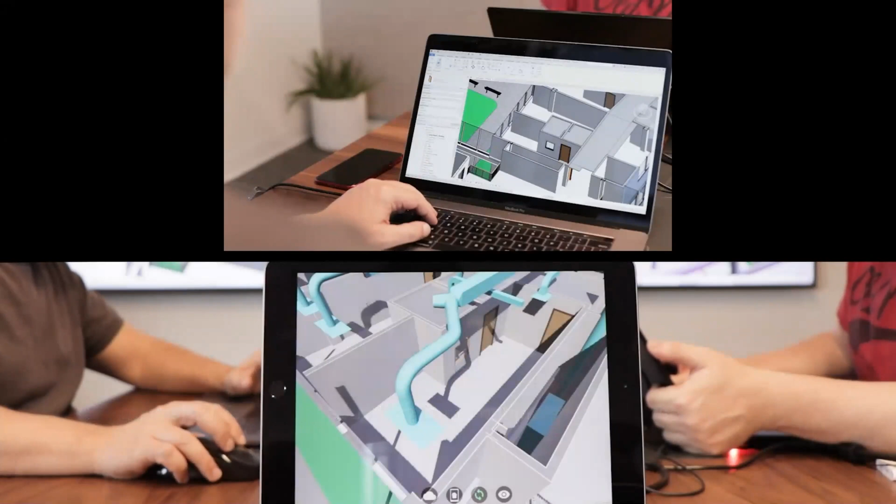Now, the key element in the Reflect environment is it's live. So as a designer is moving through the design tools, we can reflect that information back into these native formats, whether it be on a desktop or on an iPad.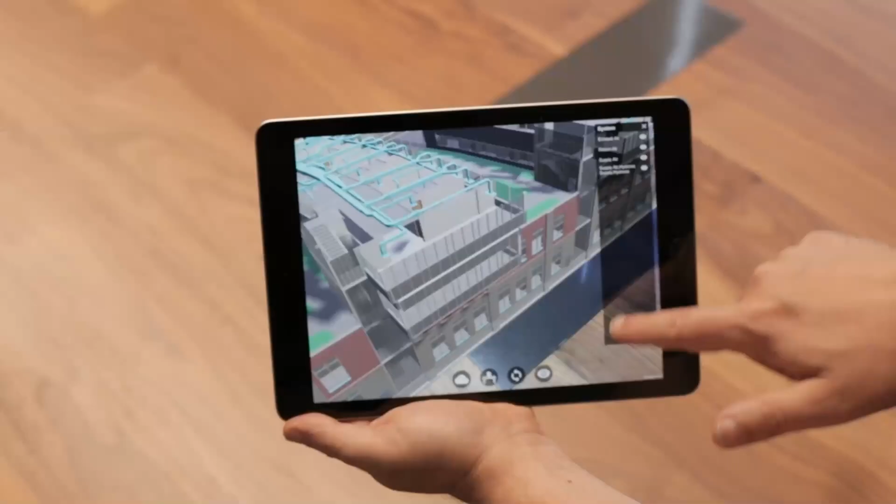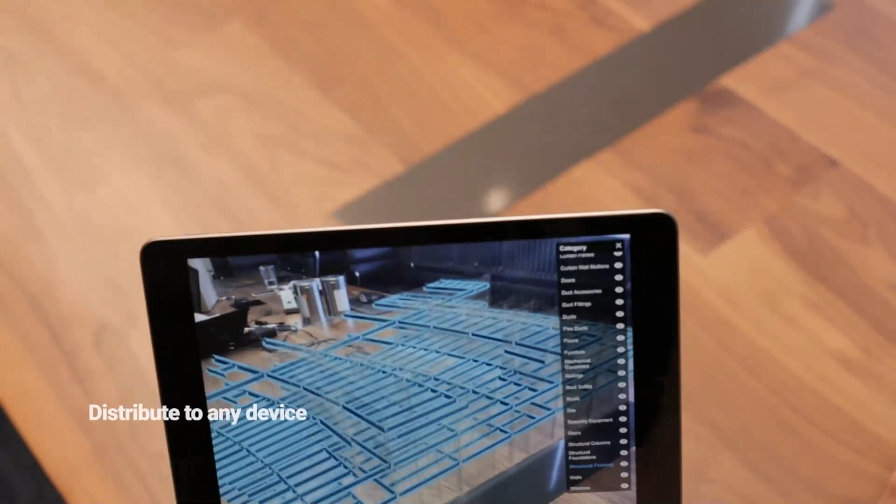And because it's based on gaming technology, it optimizes the experience to make it very easy to scale this up for different devices. So you can then provide different solutions and different access to the BIM data. So users on mobile devices and iPads, for example, can project the model into their environment. They can walk around it. They can look at the information contained in the digital information, and they can view it in any way, shape, or form that they want. And that allows a little bit more freedom in terms of how we can then start to look at how we use our information in more ways.

Now, we can take that a step further by then incorporating the development platform of Unity Pro. Unity Pro allows us then to take the capabilities of Reflect and extend it to do more functional capabilities that are specific to a particular challenge or pinch point that we have. So essentially what we're talking about is modularizing the data to different types of outputs that are specific in terms of requirement and need. So what really happens with the Unity Pro environment is we start to incorporate other aspects of the informational capabilities that we have available to us. So in terms of things like metadata, we can then start to scale out the device and delivery, and ultimately start building a custom experience for how that information is absorbed and used.

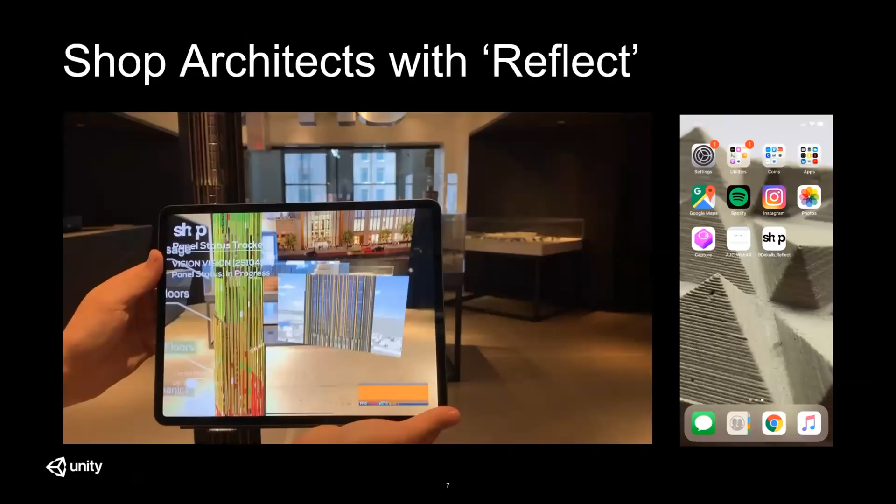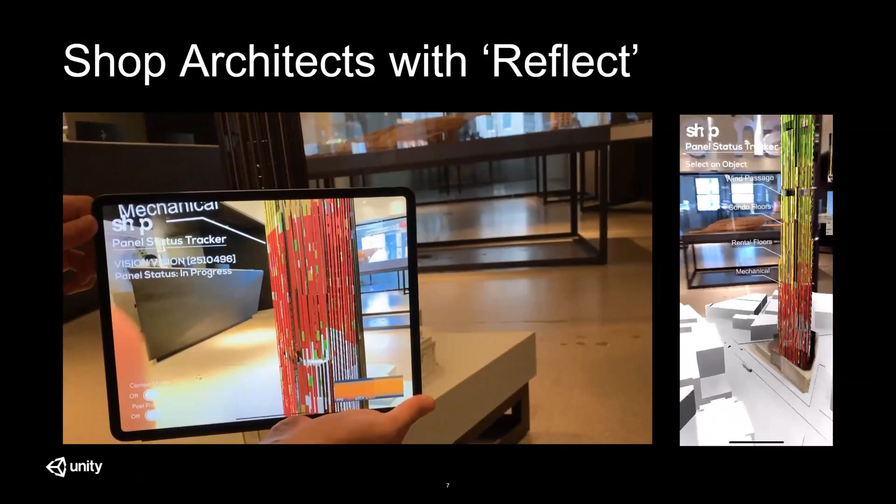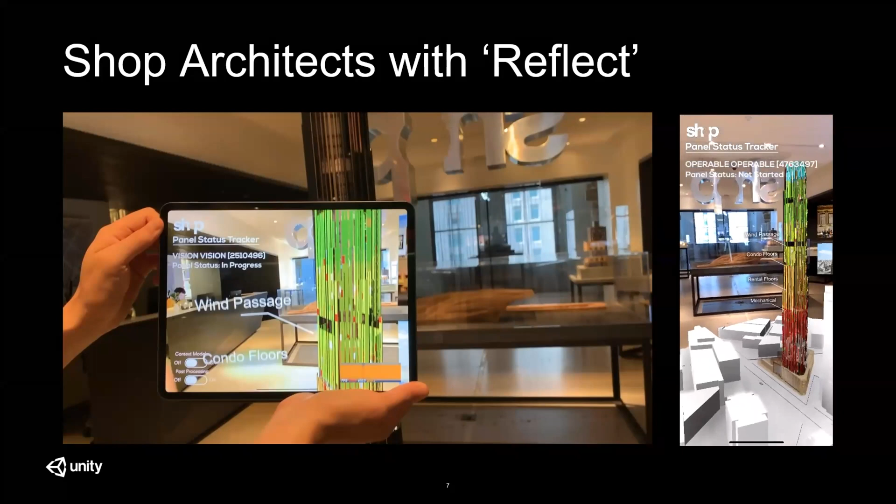So to give an example of how that's been approached, we have an architect in the US who's taken the Unity environment and then started applying that to a multi-aspect approach of how the information is absorbed. So on the left, we have an iPad approach where they're essentially pushing information on top of a physical model representation of a building they're working on. And on the right, we have the iPhone representation of it, which is essentially the same experience. So the key thing in this is it allows us to take the data, build it into a module where we can actually then decide how we push that out to the wider audience in terms of how they absorb the information, how they use it, and then ultimately how they start conveying information back.

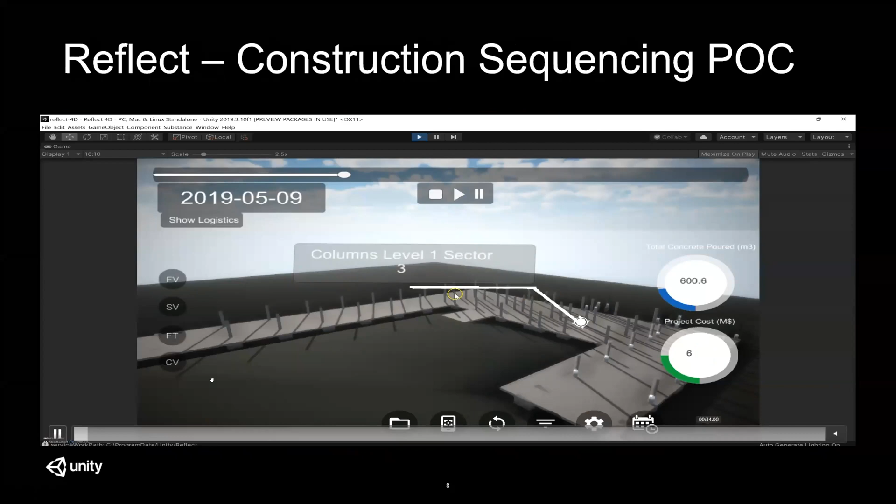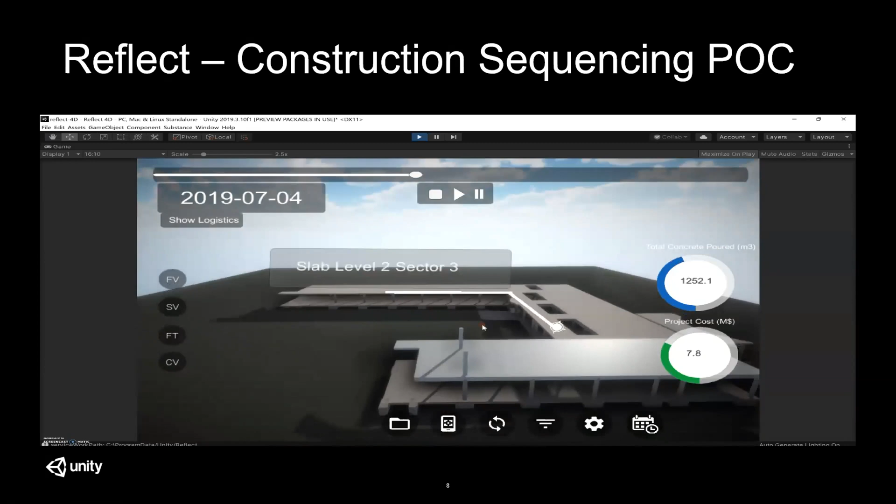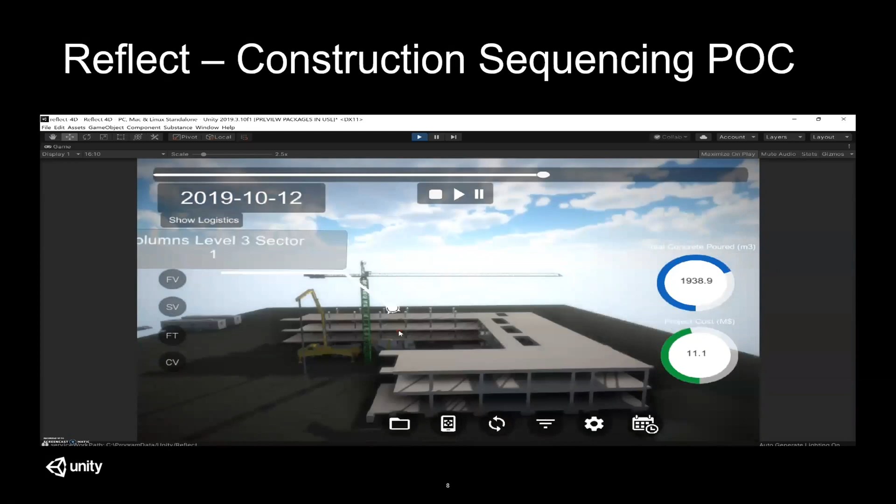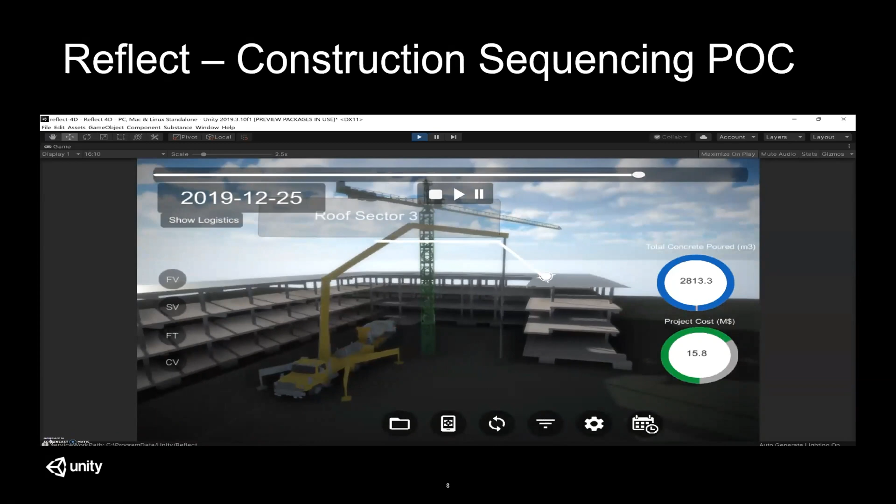Another example we're working on is looking at other aspects of, say, the whole process of delivery of construction. So, for example, we can start to look at how we build out construction sequencing and how we can convey that to a wider audience who may not necessarily have access to the design tools or coordination tools. So using the same technology, we can then start to function in other aspects of construction and construction management, but all within the same native ecosystem. So we're really leveraging information we're generating as part of our processes here, and then creating an environment and an interactive experience so people can actually start to absorb and see the information in a format that makes sense to them. But again, we're not recreating the wheel on this. We're really just reusing the same data that we're using as a part of our functional processes.

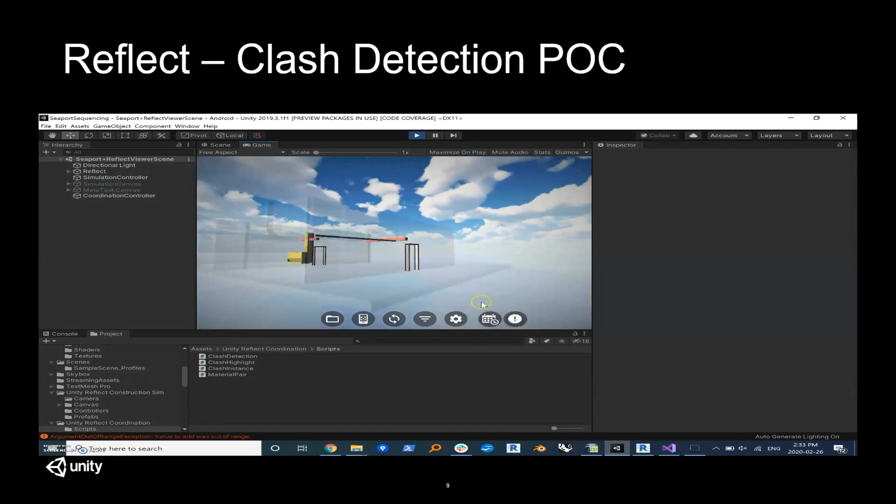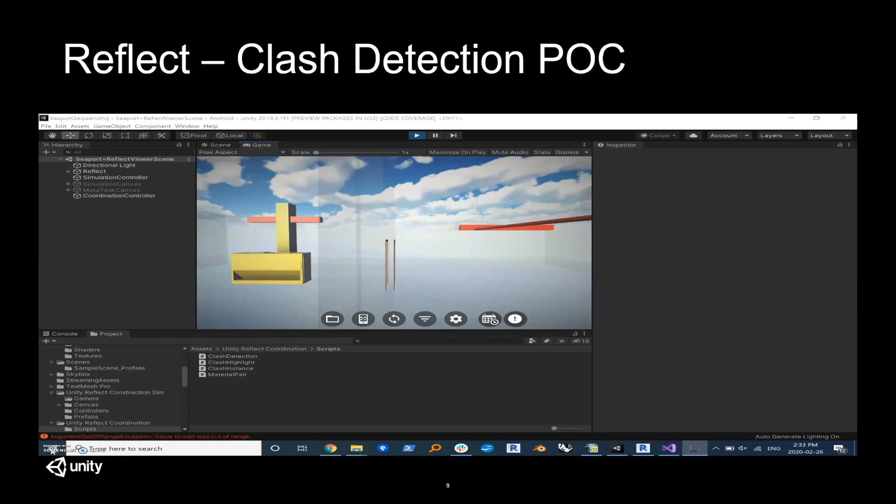Here's another example where we're looking at a particular aspect around the area of, say, clash coordination. So through our normal clash processes, we might be generating information that is specific to individuals in the organization, but other people may want to absorb that and see what's going on. So using Unity Pro and Unity Reflect, we can then take the pre-built Unity Reflect experience and enhance it by creating a custom viewer, which will allow us to take the Excel information coming from our clashes and show those clash points within the model, for example. So in each of the examples, what we're trying to do is look at the case study requirements of what functional tools we need to help the communication and collaboration process and make sure that everybody is aware and readily has access to the information and to the data, but in a form that is easily absorbed and easily used.

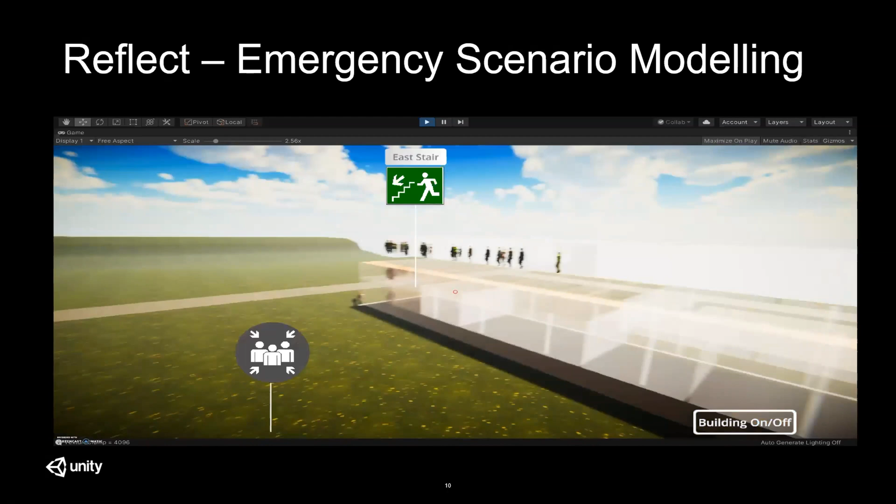So if I go forward here, another example, and again, this is all using the same BIM model information, is we've created points of interest within our design, and now we're actually adding in some functional intelligence where we use the tools that are built into Unity to create things for, say, emergency scenario modeling. So we put the people in, these all come with the Unity platform. We give them some intelligence in terms of interactivity about how they will move throughout the building. And then they will naturally move to the nearest points of interest.

In this case, these will be kind of emergency points where they'd actually come back in and stand still in the middle of the site, for example. So what we've found over the last couple of months is that people are starting to understand more about the whole collaborative and communication aspects of project delivery, and they're looking for more functional ways that they can actually start to interact more readily, more frequently.

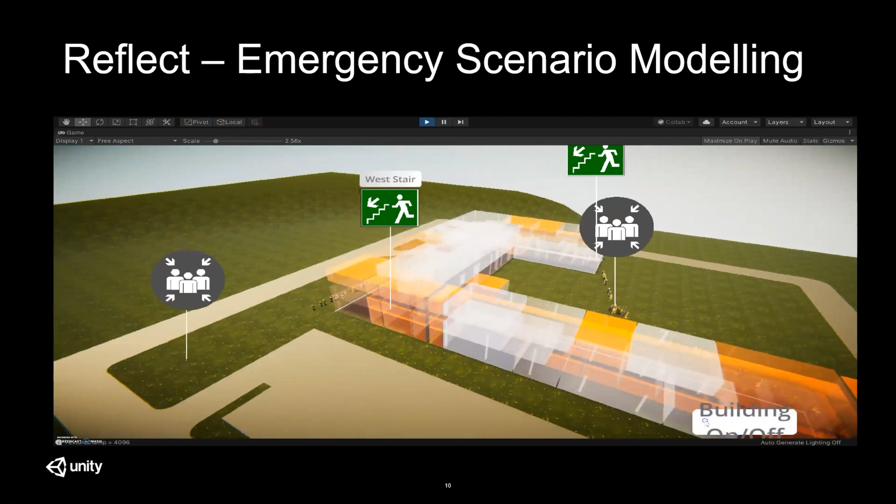The beauty of the Unity environment is that the actual process of collaborating means that the viewing tools that I've shown on the screen here are free and readily available. The cost of investment and time is really in the creation of the actual scenarios and the experiences themselves.

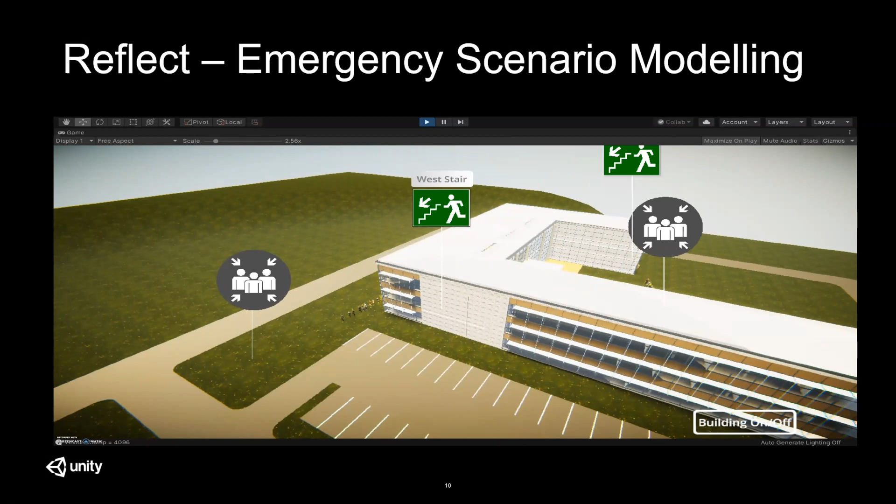So we've been working with quite a few clients over the last few months about really understanding their use case models and how they want to develop new solutions that differentiate them from their competitors and from other people. And secondly, how they can start to use their digital data better to convey intent, to convey context and that nature as well.